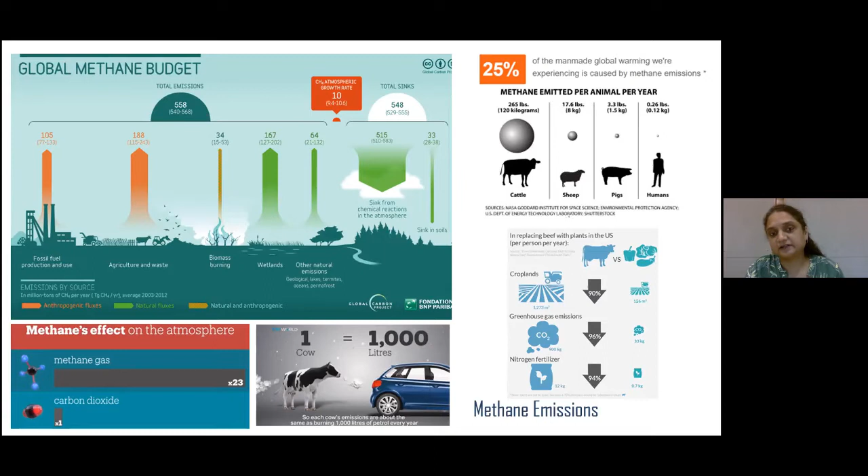So it is important for us to know that it's not only the automobile industry that we keep addressing, but we also address how and what we do with the lands that are available that have been changed from forests to agriculture, not for food for human beings, but food for the cattle. So that is also a very important aspect, which is directly relating to the global methane emissions.

So again, this is part of urban design, urban planning, that we need to understand how we develop water. Right now, water is a huge crisis. So how we design such that water is taken into consideration. And we should know that diarrhea is one of the results of poor sanitation and water supply. And we should also know that a child dies every 15 seconds. But we don't address diarrhea as much as we address other diseases.

So indirectly, it is coming back to us as urban designers and architects as to how are we doing water relevant design in today's architecture and city planning, urban planning, or even a community planning. So the first part was the climate change and the violence that it has caused. Like I told you, how many people die, how it affects us, the diseases and all that.

The second part is setting up the stage in terms of understanding the significance that we have only one Earth. We have only one choice. There is no planet B as of now. Mars is still in research stage. So right now we have only one Earth.

So for that, we also need to understand what is the ethics that we have developed as an architectural community or just as a community in general. What is the ethics that we have? We all understand ethics when we say good manners or mannerisms towards hygiene, towards respect. But what is the design ethics that we have evolved?

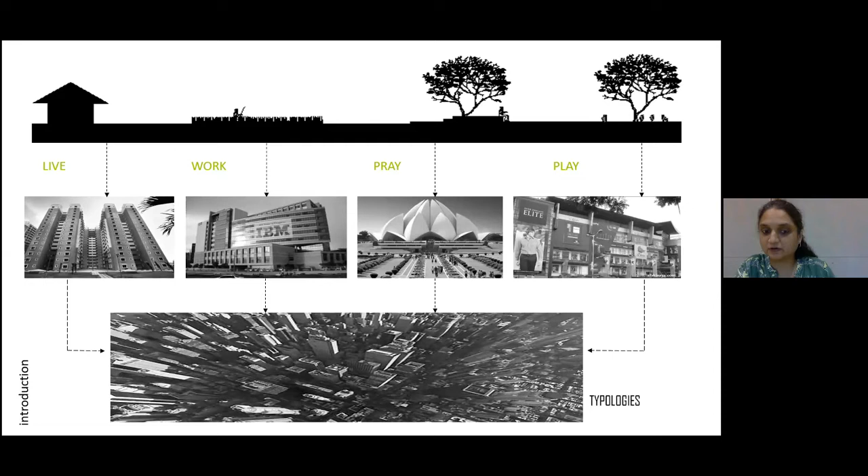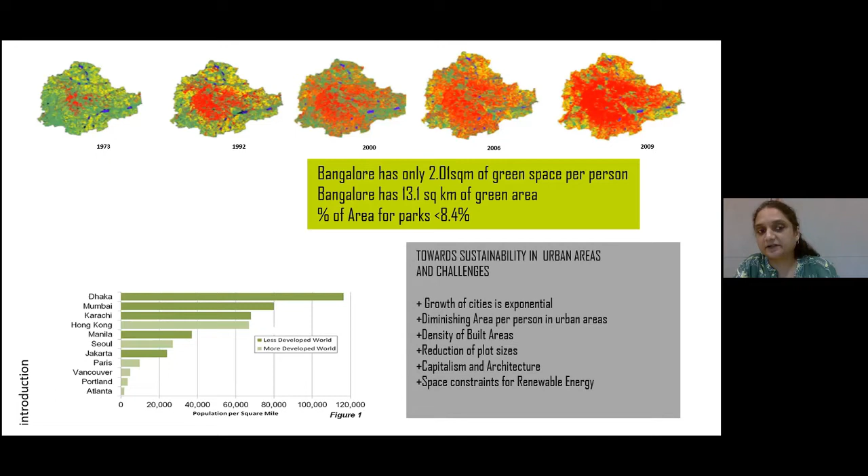So to give you a very quick description of what Bangalore has right now, even though it's called the Garden City, it has only 2.01 square meter of green space per person, whereas the recommended should be at least 10 square meter of green space per person. That is the rate at which we are losing our greenery to urban development.

So coming to the third part, which is traditional wisdom and techniques based on which we design our buildings. So it can be energy efficient or responsible or net zero, whatever you want to call it. But the idea is towards responsible architecture. So what is our basis? What are we studying? So we go back to the historical buildings, the jali, the qanat, how they used to take in water and store water underground, and then it would travel through multiple houses in a community, and water would be drawn from that, which was very common in historical days. But we don't have that kind of a system anymore.

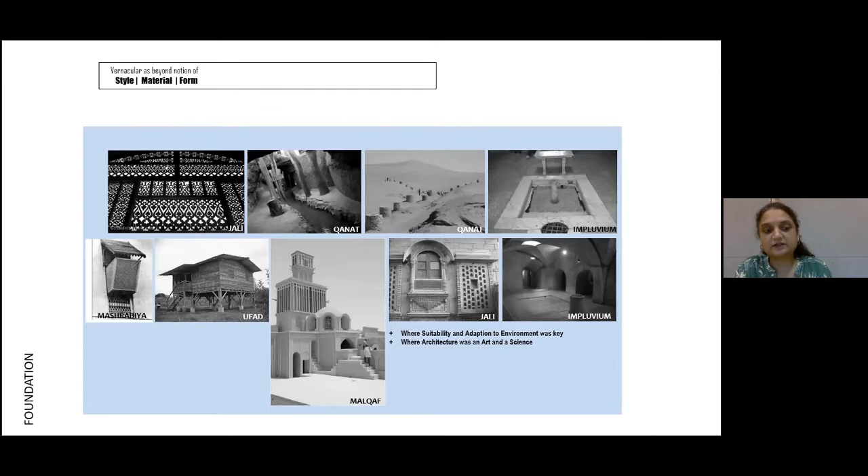Those natural, very intelligent systems in some sense, the courtyards, which were also very common, the malqafs, which are the wind towers. It was just different words that they used for a similar kind of approach to naturally control the conditions of the environment within. So how do we start our project? Once we've understood how historically they approached controlling the climate internally, then what do we do?

So we first do a data analysis. It's a simple data analysis to understand the sun movement, the sun path, the temperature, the humidity, and prepare the bioclimatic chart, which is the most important in my opinion, because it informs you very easily, very quickly, what are the different ways of naturally cooling a building. So if your lines fall within that trapezoid, you understand that you have to use high thermal mass or evaporative cooling or a combination or natural ventilation. So the minute it goes outside the comfort zone, we understand which system, or combination of systems, we need to use.

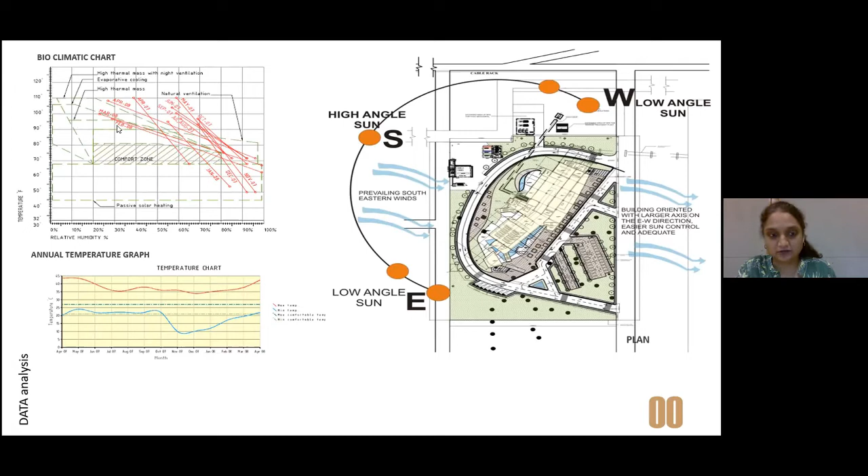The second thing is the layering. Again, this is our interpretation of how walls were built in historical buildings. The walls used to be very thick. A lot of times it would be 3 feet, 4 feet thick. Of course, we cannot make walls of such width. So what do we do as an interpretation? We do a system of layering.

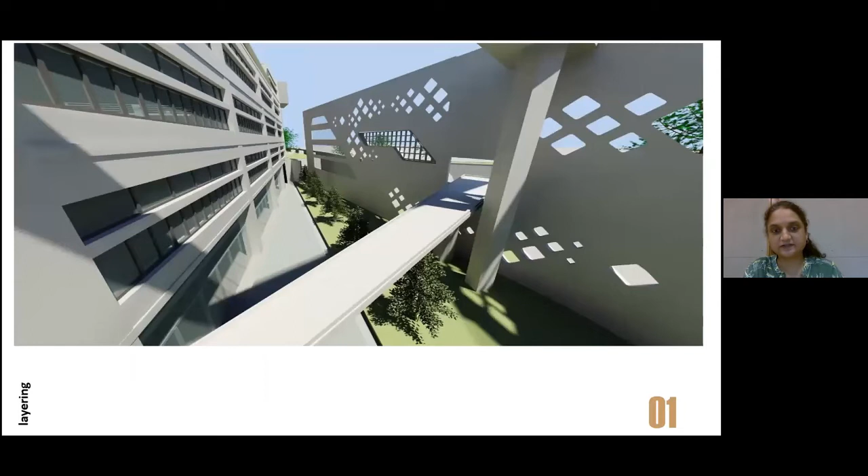So a single wall has become a double wall with insulation. Then a double wall with landscape or water. So it's the multiple layers that give you the same kind of effect as a large wall. So you can see this layering where you have the skin with these jalis, and then you have landscape, then you have water, then you have the main building.

The next thing is fenestrations. How do we plan the fenestrations? And I want to stress upon one more thing. When we say we design responsibly, it doesn't mean that we forget the aesthetics of architecture. As we all know, architecture is art and engineering and science. So it's a combination of all of these subjects that we learn and we analyze, and we put them together in such a way that the building invites you, it inspires you, and yet it is efficient.

It is not just the efficiency. We cannot forget the word about inspiration, and the building should have that positive ambience. If we fail that and we just make it an engineering aspiration of just making it efficient, I think we lose the path as an architect. So we need to respect the fact that we are an architect who designs buildings that make a difference and have a positive impact in people's life.

So the fenestrations can be multiple levels and multiple purposes. So if you see this leftmost corner of the window, you have a combination of stack effect, because we have windows on the top, we have windows at the bottom, and then we have windows that are small and windows that are big to accommodate, because this was for a school, the vision of a child when he's standing, and also to allow for the vision for an adult when he's standing to look out into the outside.

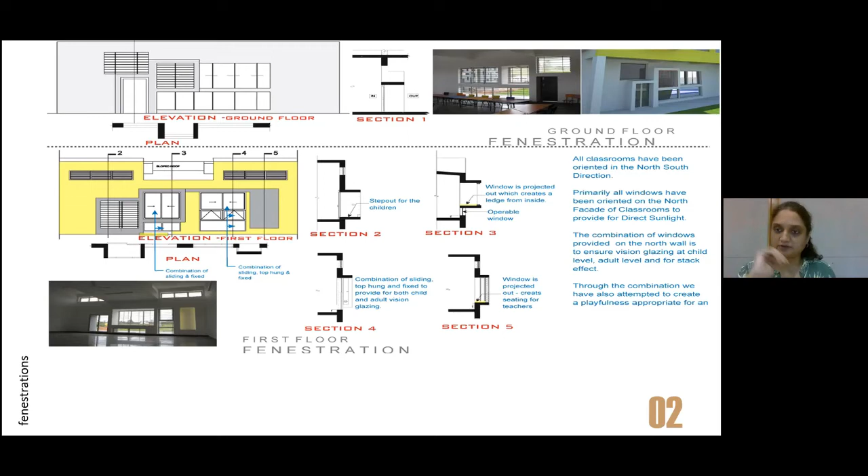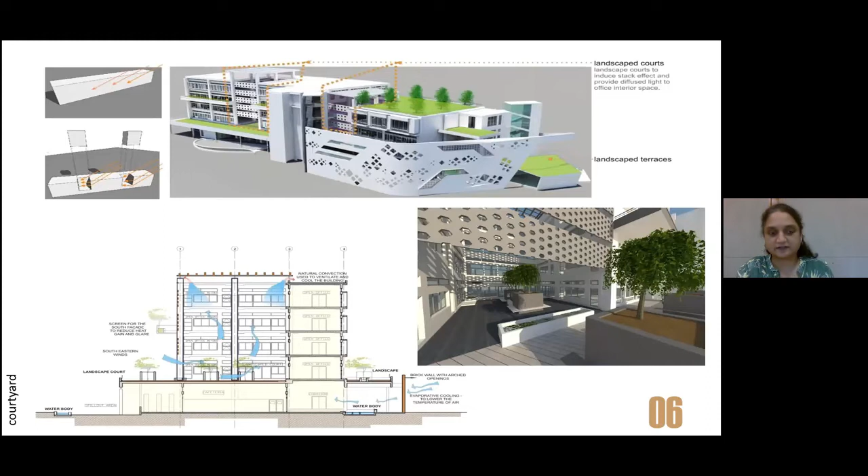So courtyard effects. Again, all of these elements that I'm showing you are all present in traditional buildings. It's just that we have incorporated all these elements in a manner that is suitable for today's design aesthetics. So the movement of air through a courtyard, we're aware of that, of how we take in air. If it is hot air, what we have done is, if you see my mouse, we take in air from a little distance where there's more greenery.

Make it go through the earth, because we all are aware that the temperature 4 meters under the earth is always constant. So the heat exchange can happen, and the air that is passing through the pipes gives out its heat to the earth. Then the pre-cooled air can enter the air handling unit to further cool the buildings on every floor. So it's just a simple photograph of when they were laying the pipes for the earth air tunnel in one of the projects. So these are all simple, cost-effective measures for natural cooling.

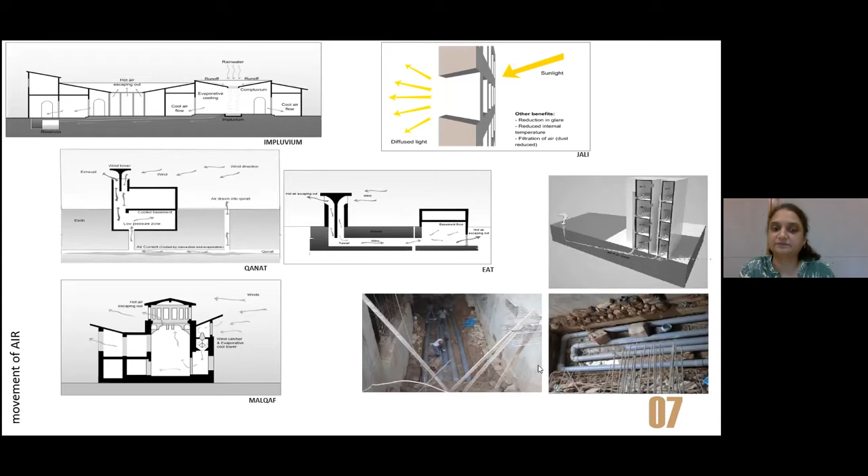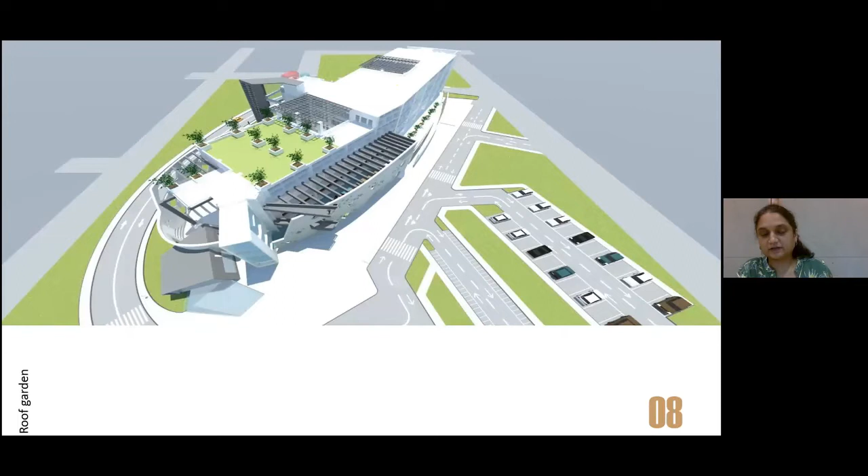So roof garden. Again, we are aware that heat can enter our building from 3 places: from the roof, from the ground, and from the sides, which is the envelope. So we discussed the envelope through layering, through fenestrations, then the orientation. Then we've discussed the earth. Actually, what we do where it is possible is to move the main activities of the office to the first level. So in the ground level, you have activities such as cafeteria, library, which are not used throughout the day. So automatically the heat gain from the ground is also reduced.

Then the roof garden, we all know that we can reduce the storm water, the roof water outflow from the rains to the ground, if you have a roof garden. It also cools the floor below.

So again, solar energy. There's always two sides to any renewable measure. Like let's say there's a new movie by Michael Moore, which shows how solar energy is not really effective in terms of not harming the environment, because of the amount of solar panels that are going to be discarded in a couple of years. What do we do with that waste? How do we treat it? So that becomes a huge environmental problem, because the solar panels' life is usually about 20, 25 years, is what I have understood from the different manufacturers.

So what do we do after its life cycle? So they have to find a solution to that. But as of now, we are still considering that solar panels are good, solar energy is good. So we had proposed solar panels, whether it's a retail or whether it's a house.

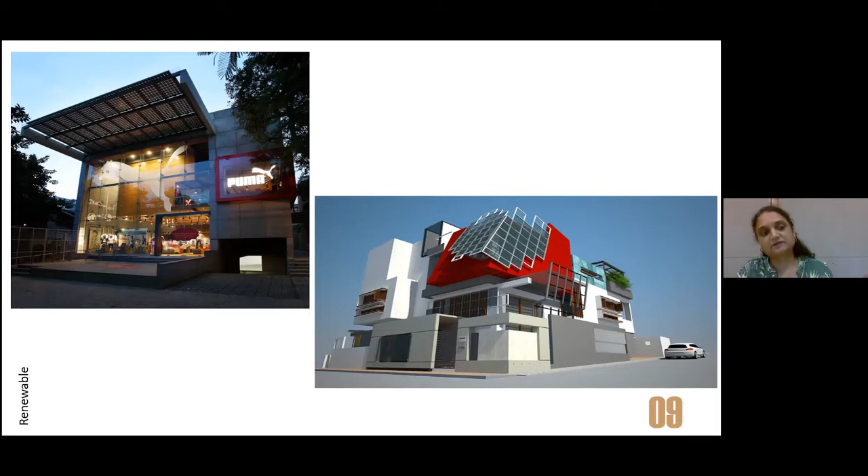So these were the different approaches. Now coming to case studies. So I can share two case studies, and one is an office building and one is a retail building. This is a building for Karnataka Power Corporation.

And it has also been taken as one of the 16 or 18 projects by UNDP, that's United Nations Development Program, as a building that has good or interesting, innovative green building features. So it has been considered for one of their projects, of the 18 projects.

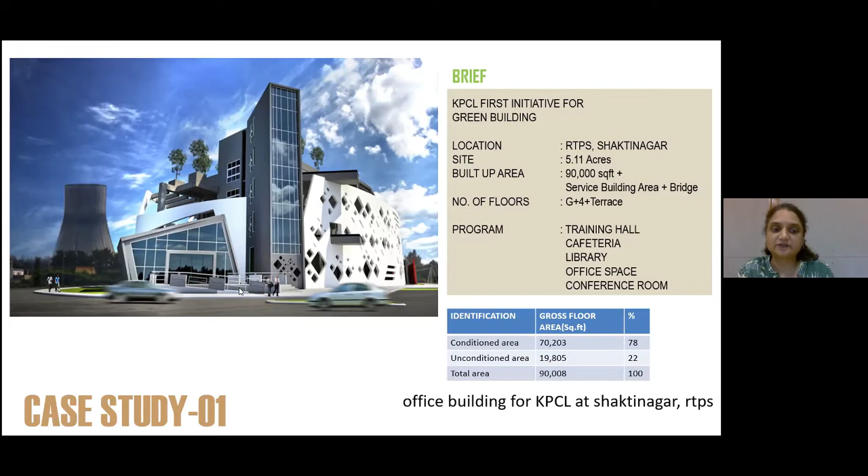And this is coming up in Raichur, where there's also 8 thermal power plants. So majority of Bangalore's electricity comes from Raichur. So this is their administrative building. So they wanted to set an example of being energy efficient, since they are the energy producers.

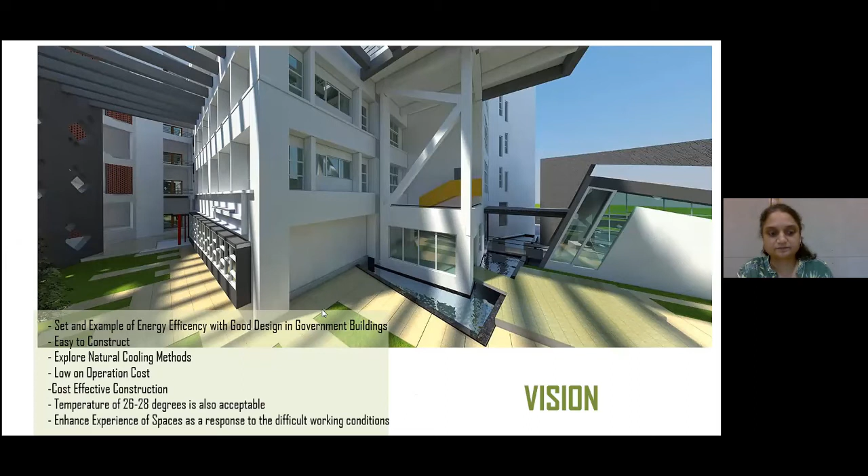So the key sustainable elements for this building is the orientation, because we had the flexibility of having a larger site, so we were able to orient it correctly. The massing correctly, where the south is higher, the north is lower, so automatically the terrace is shaded. The fenestrations, we did a lot of calculations to understand and size the fenestrations accordingly. The daylight was also ensured to all parts of the building.

So the width of the building was designed in such a way that the sunlight enters to the middle of the building. Earth air tunnels were used for pre-cooling, layering of buildings. So all the concepts that I was describing earlier have all been incorporated in the best feasible manner. Then the masonry blocks, we used fly ash, because fly ash was a waste product of their coal generation plant. So it absolutely makes sense for us to use their waste blocks that are made from fly ash.

And the chillers are not water cooled, not air cooled. Instead, it is a vapor absorption machine, because we were going to use steam, which is also a waste for them, because that's generated from the power plant. Then the glazing was specified accordingly. We had roof gardens. Then the paints were specified. So all those are simple material specifications.

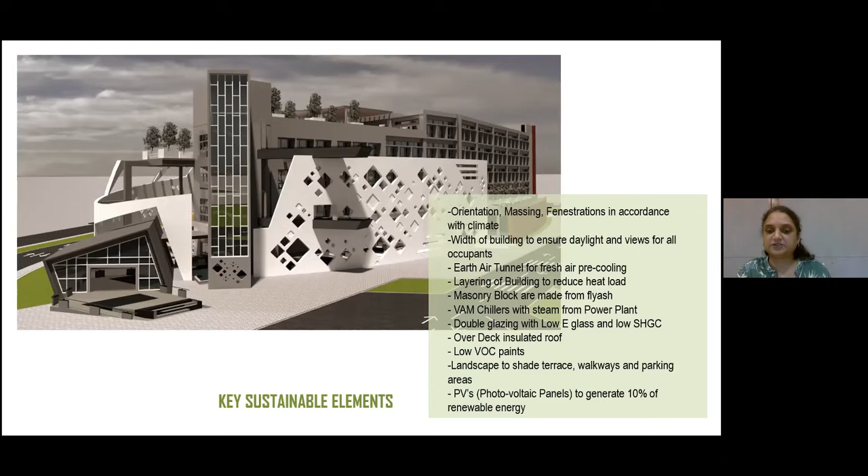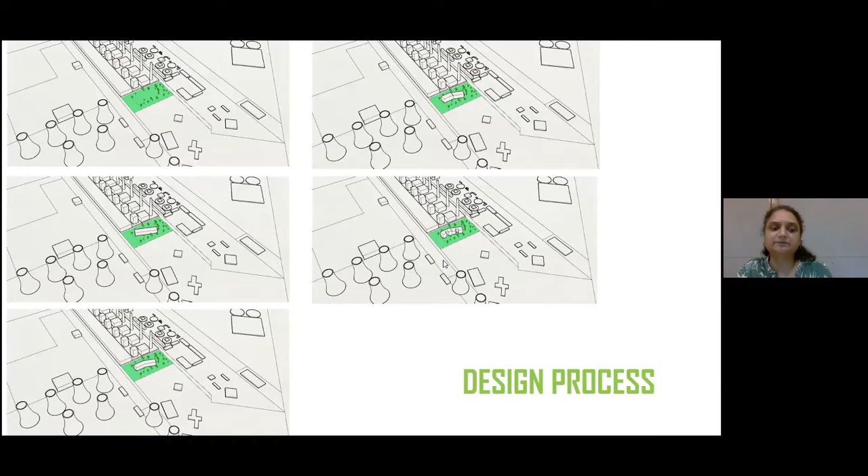So this is just to show the design process. The first one is just to show the trees that were existing. We had to orient the building so that none of the trees were disturbed or cut. Then we further oriented it to achieve what we wanted in the plan and still not disturb the surrounding. And then introducing the 2 courtyards. So it's a very simple design process in terms of the massing.

So you can see how the courtyards were inserted, such that all office areas have a visual connection to the outside, that means to the greenery and to the daylight. And the courtyards were again shaded, because Raichur is hot or very hot. Nobody will come into the courtyard if the courtyards are not shaded.

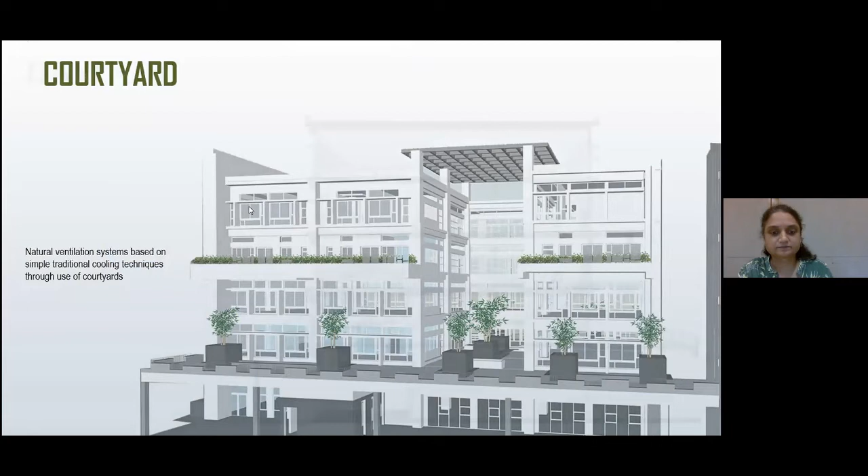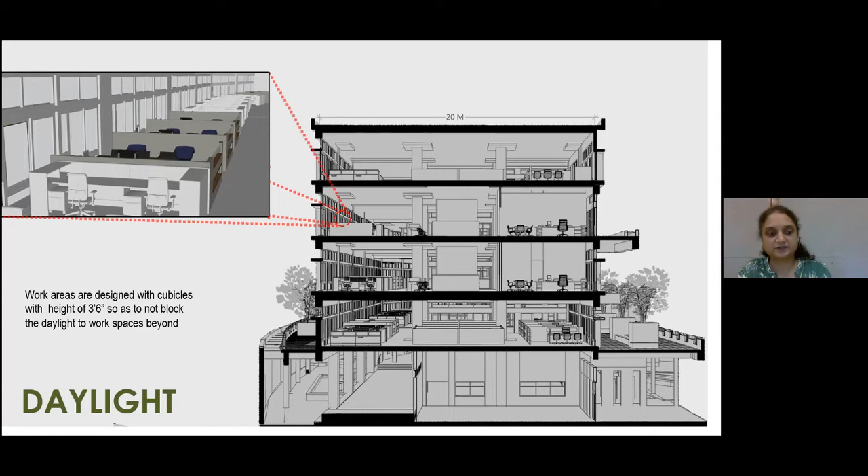So you can see how the daylight is coming into the central part of the building as well. And all the offices are like an open office workstation, so that you're not blocking the daylight to the workstations a little away from the window. So again, we have these chajjas that also act to reflect the light, so they also act as light shelves. So we have an extensive system of earth air tunnel, so that the pre-cooled air enters the building.

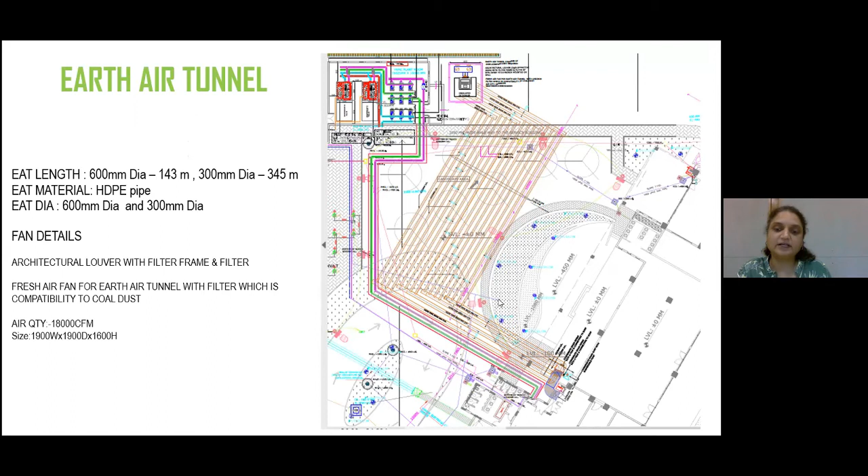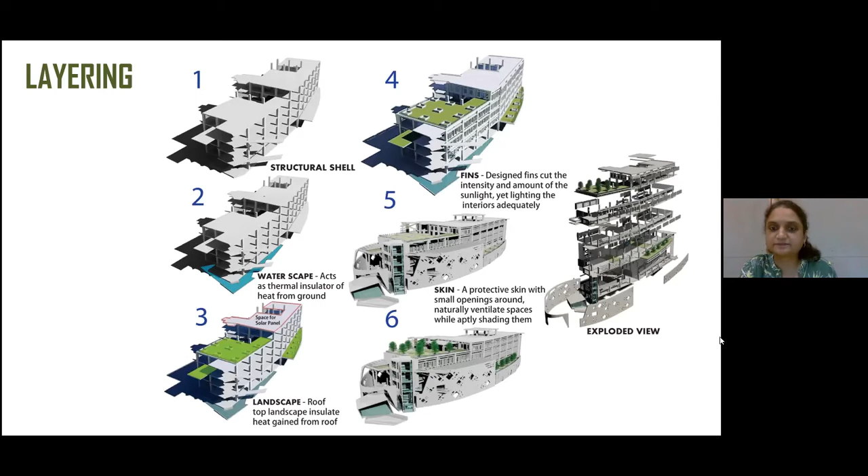So you have the structural shell, then you have the water, then the landscape as a third layer, then you have the fins, the skin, and you have the whole exploded view as well that you can see. So these are again just to show you the multiple layers that we have. So it's almost complete. Hopefully in another 2-3 months, the building should be operational.

And we've designed it in such a way that they don't need to use the AC, because in a place like Raichur, they're very comfortable even with 35 degrees. So we have tried to attain, let's say, 28 to 30 with what we have designed. And with fans, they will be quite comfortable. So all are openable windows with cross ventilation. So they should be able to use the entire building without air conditioning.

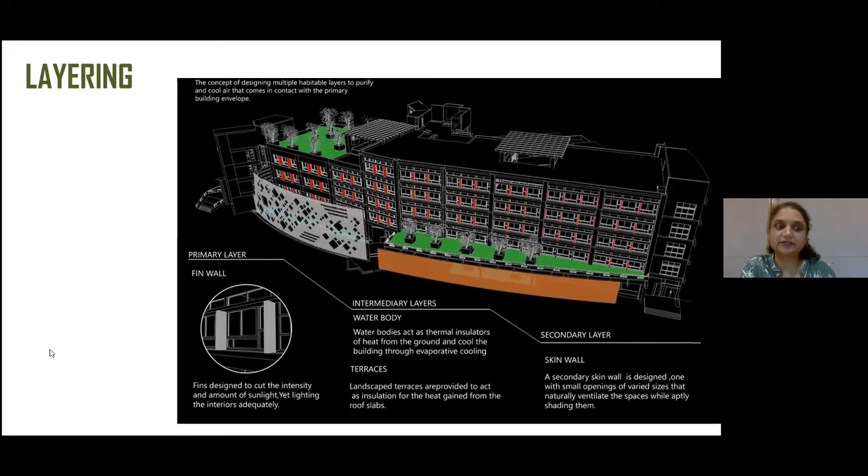One of the other buildings that we have completed for Karnataka Power Corporation in Bangalore as well is a 2.5 lakh square feet building. And similarly, we have designed it such that there's cross ventilation. So even though it's 2.5 lakh square feet, for the last 1.5 years, they have not turned on the AC. The AC has been provided as an option because we told them you don't need to use it. And they have been quite comfortable and quite happy the last 1.5 years without turning it on.

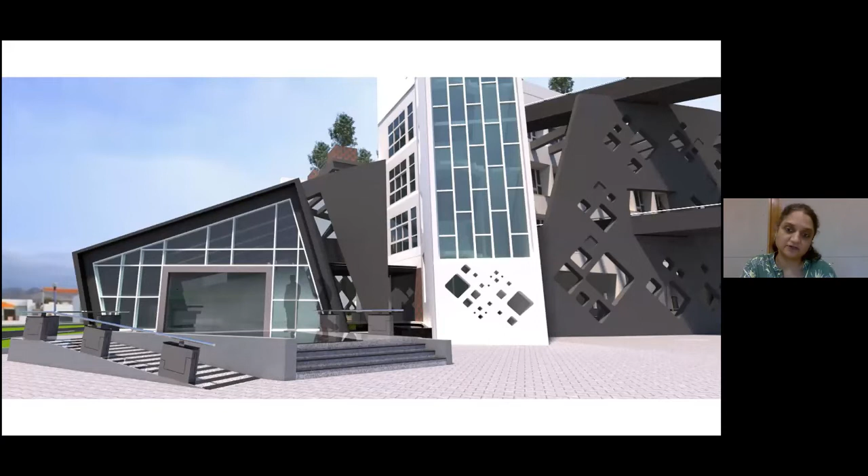So these are just a few images. This is just to show you that design has not been compromised because it was a cost efficient building or because it was an energy efficient building.

Again, a few views. These large triangles we have left open because we wanted the local artisans, the stone artisans, who are known for their craftsmanship in stone in Raichur, to come in and fill these with their stone jali work. So the building will feel like it belongs to them. It belongs to the community.

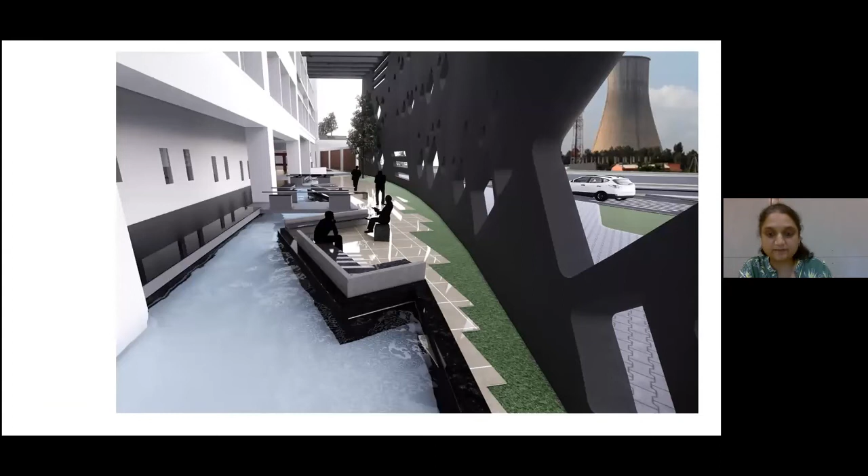So these are just some more views. You can see the terrace gardens, the fins, the courtyards, the screens in the courtyard. This is actually the bridge that you see on the right that connects to their power plant. The same thing with the water bodies: currently they do not step out in the open because it's very hot, like I said.

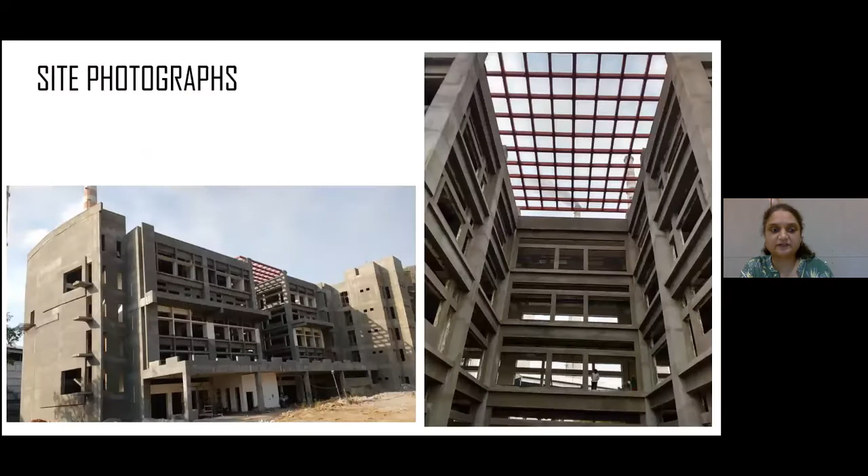So we wanted to give them these exterior spaces that they can come in and sit. They don't have to always be either at their home or within the office. We want them to experience sitting outdoors as well. So we've created these pockets for them to come together outside. These are the site photographs. Of course, it's gone a little beyond that. I don't have the most updated because we have not visited during the COVID time.

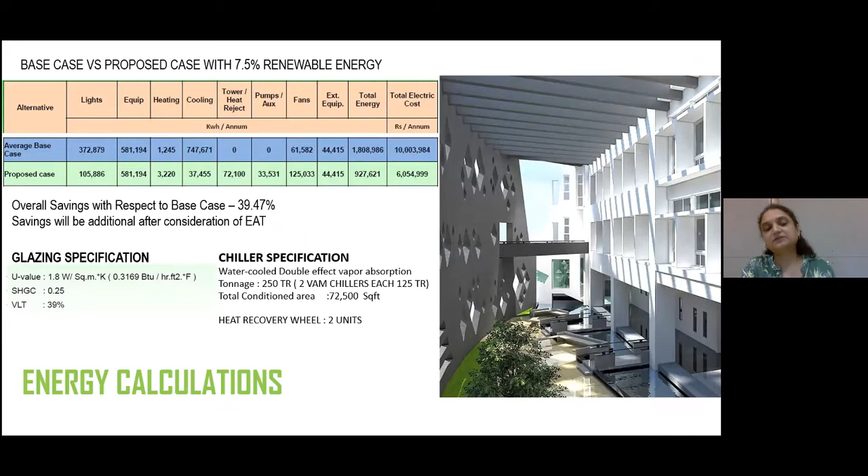As per the green building specification, it's about 40%. But in reality, if you don't turn on the AC, the percentage is much higher. But for green building, we need to show that we're achieving 26 degrees. So based on that 26 degrees, it becomes 39.47% efficiency.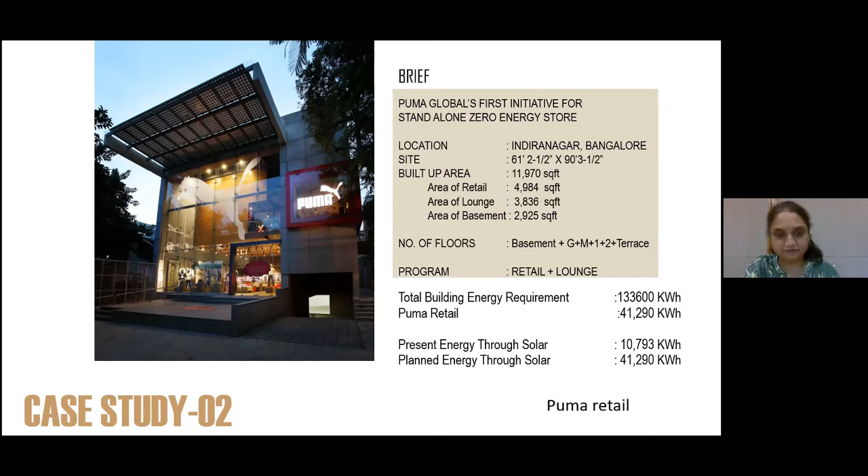So the second one was an attempt towards net zero. This is for Puma Global, and it was their first net zero initiative worldwide. This project was initiated by their headquarters in Europe. It was an invited competition, which we got, and we've completed the building. It's, I think, 5-6 years old already.

Again, this is a completely different project from KPCL, where the site is an urban condition. We have very little space. So the challenge is it's a very small space with a lot of constraints, because the landlord who owns the land is different from the person who's going to build it. So we need to make sure that both are happy. And they wanted us to go beyond LEED. They wanted us to be net zero.

In this one, the main sustainable elements are the earth air tunnel again for pre-cooling. Then you can see these black squares. These are all the underfloor air diffusers. To save energy, we didn't want to cool the upper part. Our human height is 6 feet, so why do we need to cool anything above it? So we've taken the floor diffuser, so we don't waste energy.

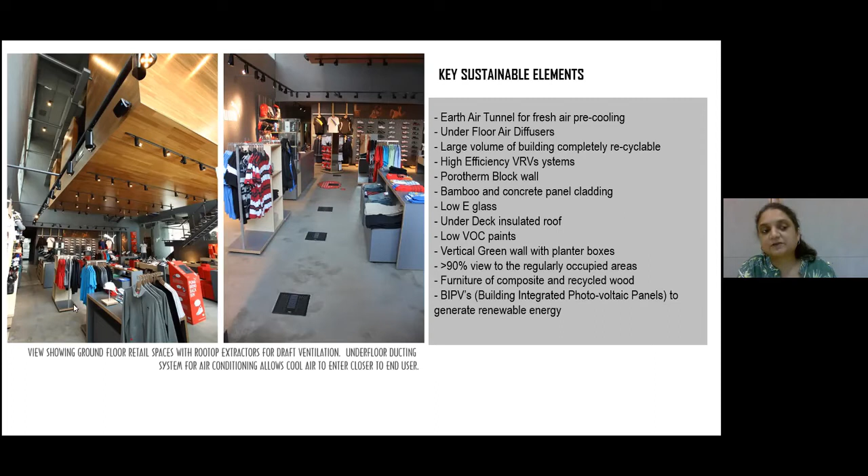Then the entire building is suspended. The first floor and the second floor are suspended from the roof. What happens is that creates a space all around the building for hot air to rise and go into the roof. I'll come into that as well. So you can see the design process. Again, it's a simple thing.

It's a typical urban condition where this is the block. You have to maximize the floor area because the landlord and the retail person are paying the rent per square foot. So we have a typical block. We inserted another block within it, keeping all the sides free for air to go up. Then we cut it up in the ground floor and introduced the diffusers in the ground, the blue dots. So you can see the hot air that rises up on all the sides.

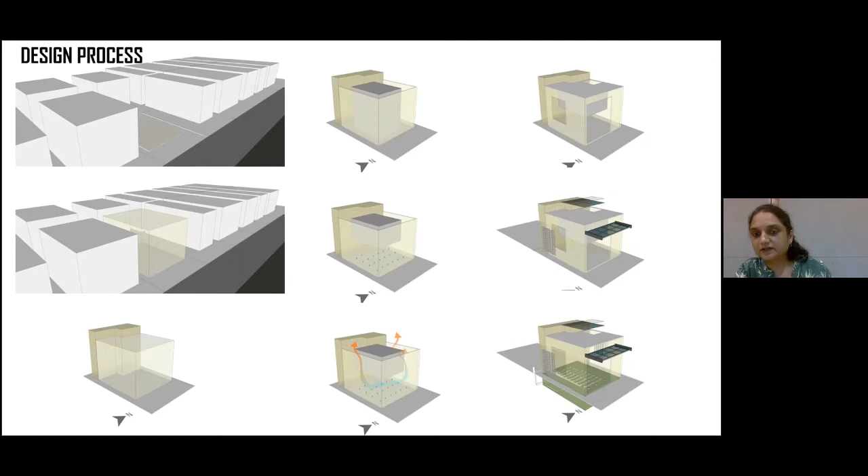Then we've cut open for the glass. After that, because it's east facing, we've introduced a huge 18-feet canopy with solar panels, BIPV panels, so it's generating electricity. Then we have the fins on the south side so that the heat gain in the glass is reduced. So you can see the simple methodology that we have followed to get the massing right.

In the 3D you can see the same thing I've explained: the extractors on the roof, and the bottom one is the intake of the air that gets pre-cooled through the earth air tunnel under the parking area, goes to the AHU, air handling unit, and gets further cooled if required. If not required, it just comes into the diffusers. Then the hot air rises up to the extractors.

You can also see where it's written social area and retail. That's the entire volume that is suspended from the roof. With retail, we all know that every few years they need a complete revamp, or they may not even be in this building anymore. They may move on. You don't know the change that happens in retail because it's very fast.

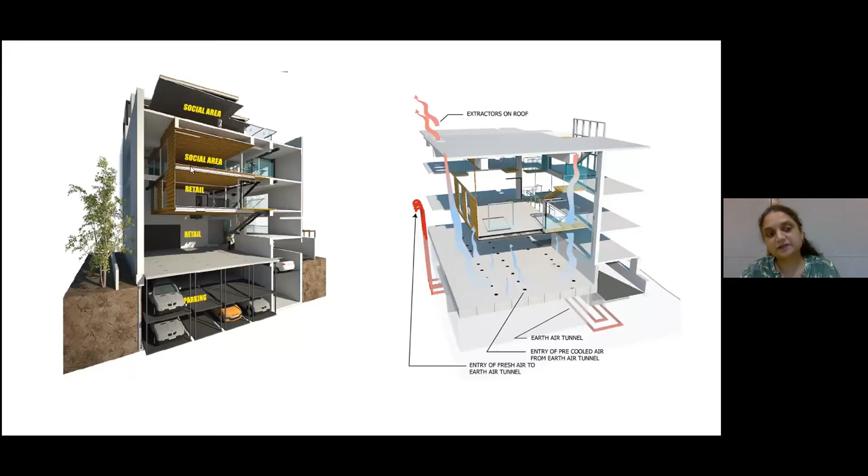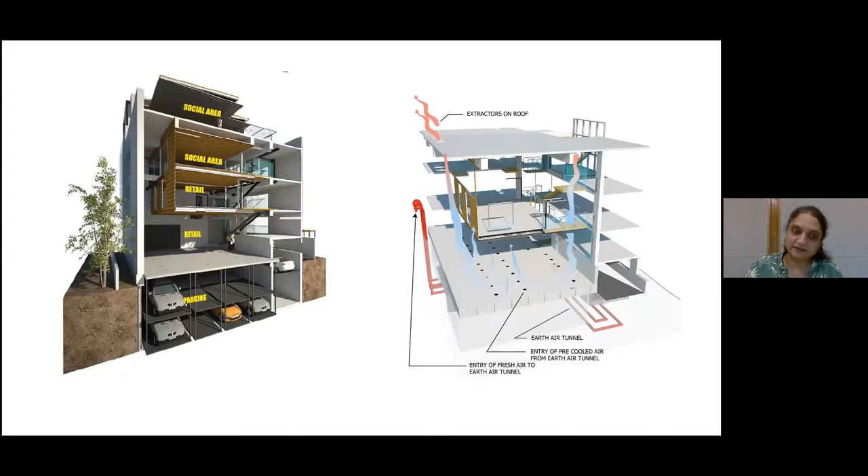So to minimize construction waste and allow for adaptability and flexibility, this entire first and second floor is completely removable because it's just metal and bamboo. So it can be reused the same way and assembled in a different location, or it can be dismantled completely and reused in whichever manner they want.

So this is to show you the suspended area. And it's an exploded view of all the different parts or the elements that have made this building holistically, environmentally responsible. And even without AC, the building can work at least 8 to 9 months in a year, because retail, they have to not just keep 26, they need 23, 24. So we monitored all the numbers for the first 1 year as per green building. And we found out that they were able to use it without AC because Bangalore has a fantastic weather condition.

Only constraint over here was no glass could be openable. So that is why we had to have the system of air constantly being sucked out so that there's a constant air change, because we cannot keep glass open because of safety reasons for a retail. So through this earth air tunnel and extractors on roof, we were able to achieve this continuous movement.

And this design was also featured in NDTV, and it has been published in many articles internationally as well as nationally. The reason being, it was one of the first retail that could function without air conditioning with closed glass. So it was a completely different concept for the retail players to understand that this is possible. We could do this on a much larger scale with just simple solutions based on, again, the traditional wisdom.

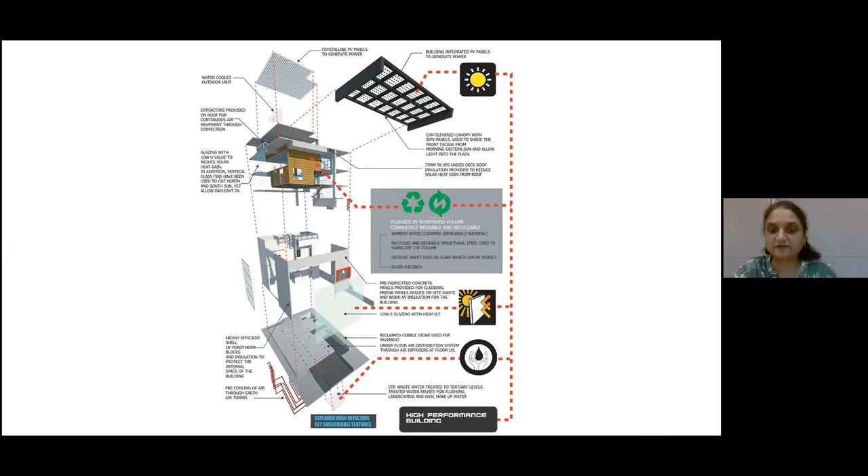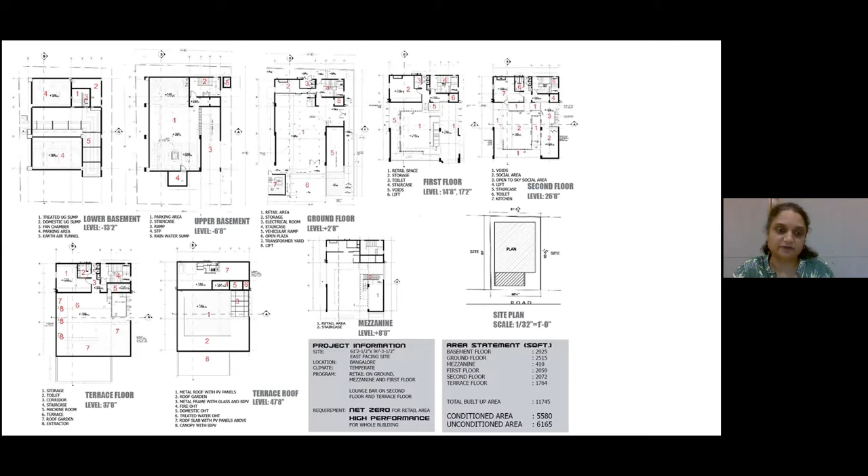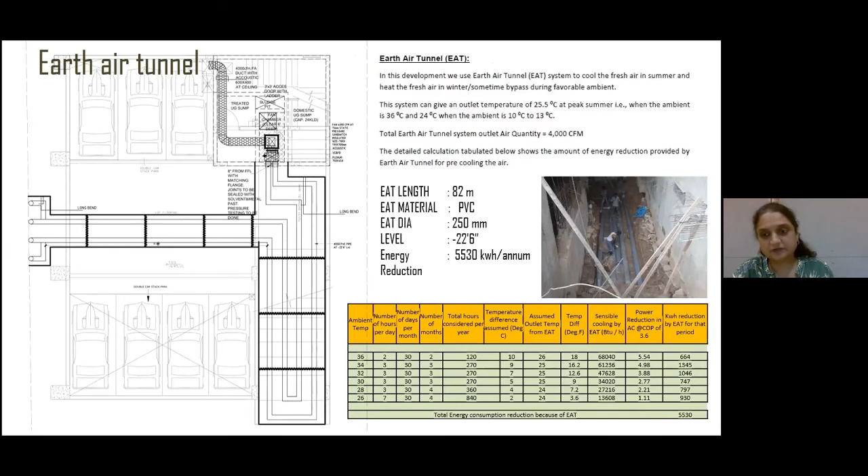So these are just the plans. You can see the simplicity of the planning because we need to maximize. We cannot forget what is required for people, but take this as a constraint that will help us innovate further. So this is just to show you the earth air tunnel and how much energy we were able to reduce. And you can see the photograph also. It's simple, not highly skilled labor. It's regular plumbers who have executed this job. So these are few photographs of the Puma building.

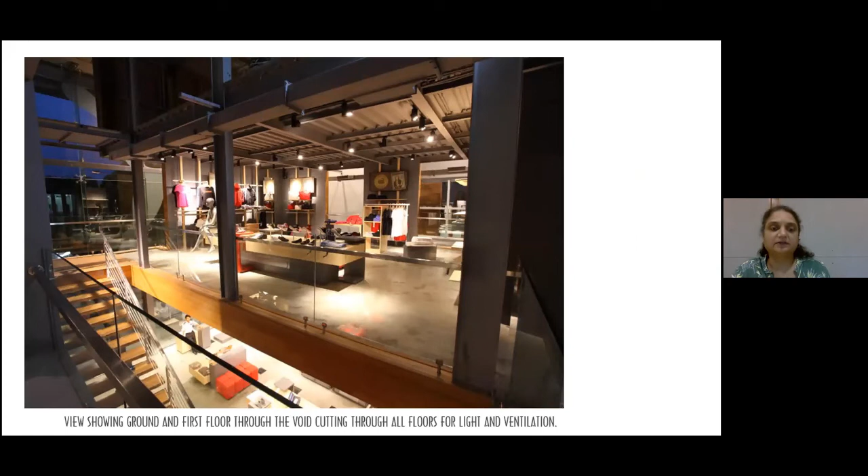So again, coming back to design, like I'm stressing again, we have not compromised on the design. Detailing and designing to ensure the quality of what needs to be achieved as an architect should never be compromised. So again, to minimize material, the false ceilings have been avoided. The lighting was tested multiple times, because even though it's LED lighting, a lot of times for retail, they prefer not to go with LED because of the color rendering. So we did multiple tests till they were comfortable with the color rendering achieved by these LED lights.

So I just showed you, touched upon two different projects. So to end it, I would like to say each of us have a role to play. So make no little plans. They have no magic to stir men's blood and probably themselves will not be realized. It's important for us to make big plans, aim high and hope and work to make a difference in society. Thank you.

Thank you so much for a very insightful presentation, Architect Meghna. It was a much needed reminder on climate change and design ethics. The different case studies that you've shown definitely made us ponder on the many strategies that we should ideally be adopting from the vernacular system and the amount of thought and innovation that needs to go into designing itself. So I had a couple of questions.

Yeah, please go ahead. So there are two schools of thought that I observed with respect to green. So there's materials that are directly sourced from nature, and then there are materials that are byproducts of manufacturing processes of other materials or products. So in your projects, how do you give the weightage to the choice of materials itself, or is it something that you let the function decide?

So in terms of materiality, once we have a design vision that is set for a particular project as to what is it that we want the building to talk about or stand for, that is the first step. Then the next step is once we have the vision clear, then we decide on the materials. And of course, the importance is always given to materials that are locally sourced because that would work well for the environment for that particular city.